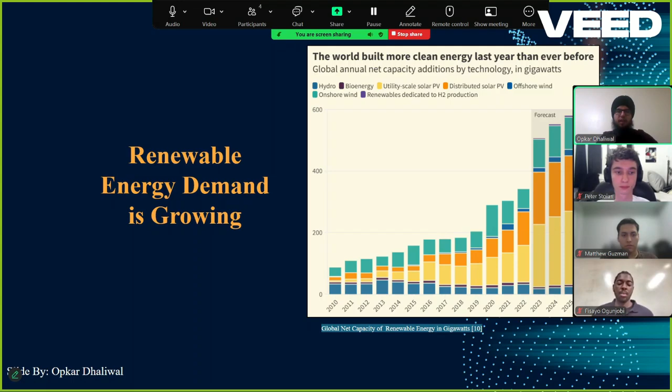As society advances their attention towards the environment and climate change, the importance of renewable energy is growing, as seen in the figure here. Renewable energy can greatly reduce the damage done to the environment. But the issue is that renewable energy sources, such as solar and wind, have a major drawback in that they are intermittent energy sources. This means they have an unpredictable output based on weather conditions and climate, which makes power plants operate at less than desirable efficiencies. This can result in supply of energy being low when needed, such as in winter.

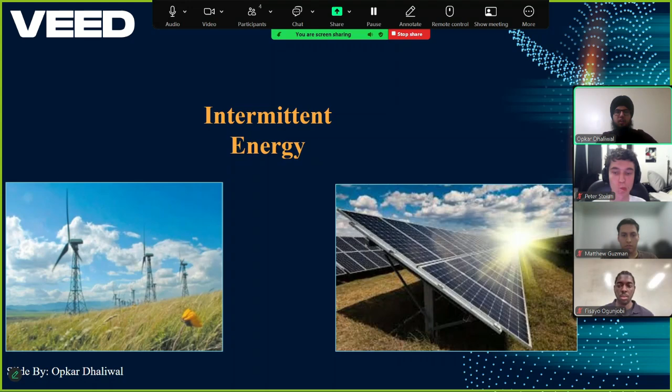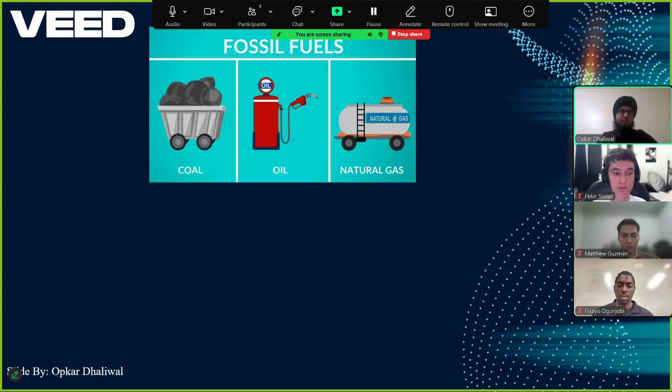The question becomes, how do we solve this issue? At first, someone might suggest looking for alternative energy sources, but this can only solve the issue in the short term. Going back to fossil fuels just aggravates the issue of climate change and results in the same problem. Others might suggest nuclear energy, which is clean energy. However, nuclear energy is not renewable and limited by materials suitable for fission like uranium and radioactive material. Other sources such as hydropower and geothermal plants are too reliant on geographic conditions and may impact Earth's environment in other ways, such as disturbing ocean flow.

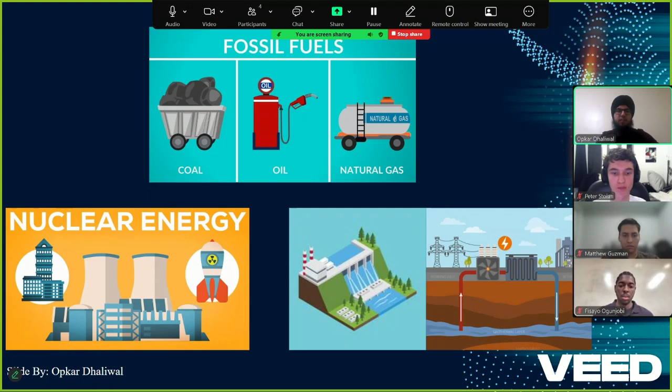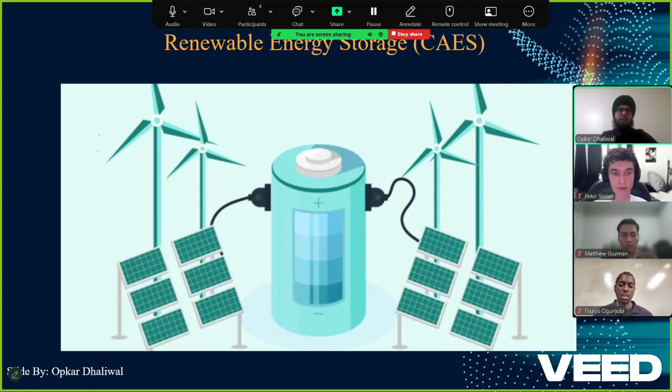The solution we have chosen to solve this issue is energy storing, more specifically compressed air energy storage. It's an emerging technology in the energy sector, a method of withholding energy until the energy is needed. This is a major focus in upcoming years to optimize renewable energy generation and would greatly progress society's efforts to net zero global emissions. The problem statement we came up with is: the intermittent nature of renewable energy sources creates grid instability and inefficiencies, while existing storage solutions have limitations in scalability and cost. Compressed air energy storage presents a promising alternative.

The purpose of this report is to give information about the current problems regarding renewable energy generation, and give some information about the emerging technology of CAES that we believe has great potential for innovation that future engineers can capitalize on.

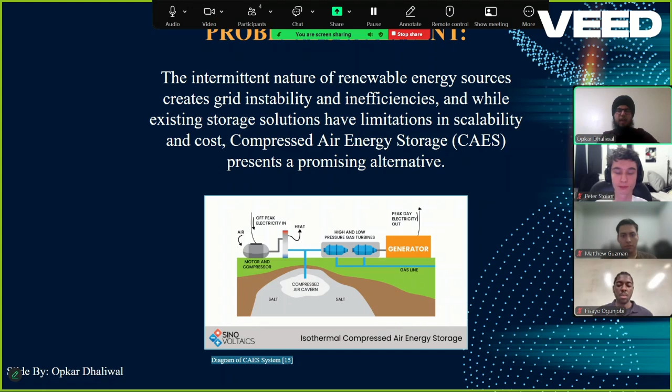Compressed air energy storage is an emerging energy storage technology that stores electricity by compressing air to very high pressures and storing it underground. It can be stored underground through many mediums, such as storage tanks or in already depleted natural gas reservoirs. After the compressed air is stored, it can be converted back into electricity by releasing the air that's stored underground. In doing this, the air is released and heated, which leads to its expansion, which is used to generate electricity through turbines. This works similarly to hydro storage,

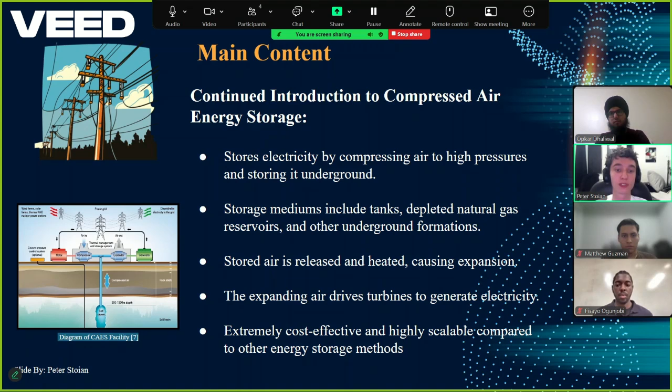which leads to the question of why compressed air energy storage is such a promising technology. Compressed air energy storage poses many benefits over other forms of energy storage, as it is extremely cost-effective, extremely easy to scale up, and is very flexible, having many different varieties.

There are three main types of compressed air energy storage systems, with diabatic compressed air energy storage being the most prevalent today. Diabatic compressed air energy storage uses electricity to store compressed air underground, which can then be converted back into electricity. The key factor is looking at the process of converting the compressed air back into electricity, as diabatic systems require external sources of energy to heat up the air before its release, which increases the total output of energy.

Another important version of compressed air energy storage is adiabatic storage. Whereas diabatic systems use external sources of energy to reheat the air before its release, adiabatic systems instead save energy generated from the compression phase and use it in the heating process. This eliminates the need for non-renewable energy sources or external sources of energy, which increases efficiency.

The third and final type of compressed air energy storage system is isothermal storage. The key difference that differentiates isothermal is the fact that during the compression and expansion phases, it will keep the temperature at a constant level, which will reduce the amount of energy lost.

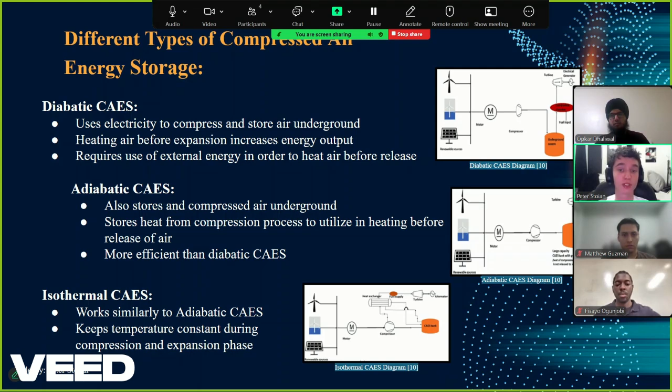The biggest limitation with this specific technology is that it is very difficult to implement on a large scale due to the difficulties in managing heat transfer throughout the system. Now, let's look at the main advantages of compressed air energy storage.

First, it is eco-friendly. It doesn't rely on rare earth metals or toxic chemicals, unlike battery systems. Secondly, it is cost-effective at a large scale. It is cheaper to produce at a cost per unit area. Another big plus is high scalability. You can often use existing geological formations like salt caverns, which keep the cost for infrastructure lower.

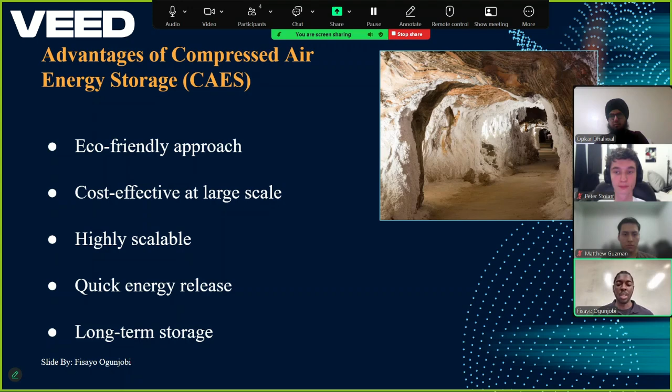It can also release energy quickly, which helps stabilize the grid when demand suddenly spikes. Finally, it allows for long-term storage, which makes it especially valuable for renewable energy like wind and solar, which we may need for a long period of time.

However, CAES does have some important limitations. Its overall efficiency tends to be lower than lithium-ion batteries, which can exceed 90%. Then there are geological constraints. If suitable caverns or reservoirs aren't available, creating them could be very expensive.

Another issue is heat management. The compression and expansion process can lose energy if heat is not properly captured. So while CAES works great in the right setting, it's not always ideal for the location and scale to be properly managed. Despite these challenges, ongoing research is aiming to improve the efficiency and reduce reliance on specific geological features.

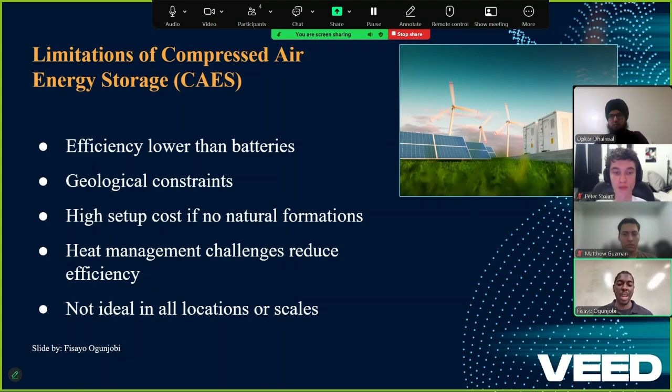The CAES method offers lower costs compared to other methods when geological conditions are favorable, such as caves or abandoned mines, and is able to convert energy back with an efficiency of around 70% under the most ideal conditions and technology. While it has some limitations in terms of efficiency and local geography, they can be surpassed, leaving this emerging technology to have a bright future ahead.

In terms of innovation, there are several possibilities. The inclusion of thermal management systems, by creating a mixed energy storage system combining CAES with thermal energy storage, allows for a more effective heat loss reduction. Combining thermal energy management systems allows for an increase in both efficiency and energy density.

Using large artificial tanks or above ground tanks can remove the need for caves while also making it more costly. In addition, future developments of CAES systems are being done in different places in the world, where smaller or even mobile CAES systems are being deployed, demonstrating the potential flexibility of the solution.

The first station using an underground compressed air energy storage system is a reservoir operated in 1978 in Germany, outputting 290 megawatts for 2 hours. The second one was built in 1991 in Alabama with 110 megawatts of output. Canada has 2 operating compressed air energy storage systems in Ontario with a total capacity of 2.4 megawatts.

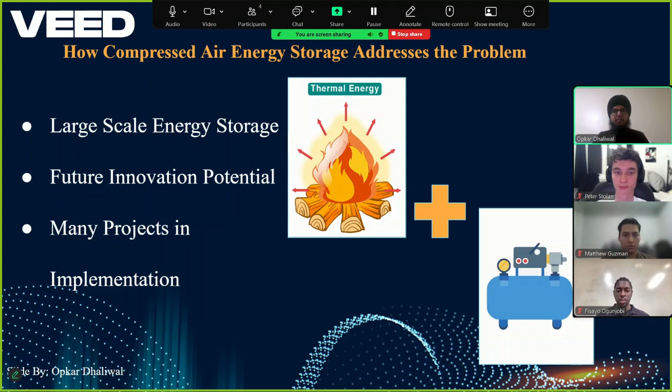And even in the last decade, several more projects have been initiated in the US with a range of 175 to 350 megawatts. As such, we believe the future prospects of CAES energy systems are very bright.

In conclusion, compressed air energy storage is a promising energy storage technology. While it has certain limitations, the continuous advancements in its technology allow for improvements in efficiency through its integration into the power grid. One of the key aspects of compressed air energy storage is its ability to store large quantities of energy at a much lower cost than other competing emerging technologies.

Unlike other competing systems, compressed air energy storage thrives in its ability to be implemented in many different geological areas as it has few constraints. Despite all of the benefits and strengths of compressed air energy storage, it also faces certain limitations, such as its overall lower efficiency. A hybrid approach would be the key to improving performance to make this system viable for future implementation.

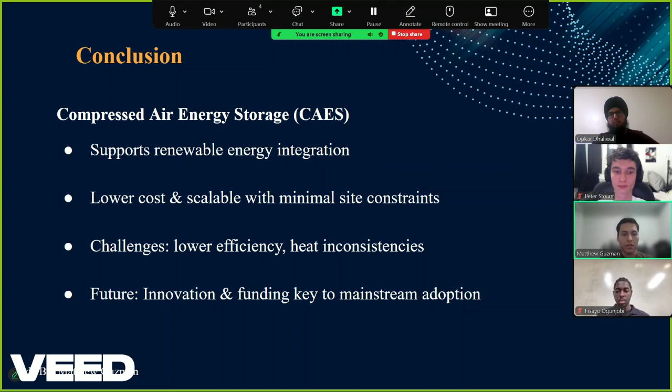Looking to the future, a continued interest in compressed air energy storage, as well as a steady flow of funding and bright minds, will all be pivotal in making this technology a mainstream energy solution. With improvements in efficiency and cost effectiveness, compressed air energy storage can be a key aspect in the transition to renewable energy sources. On the following slides are listed the references, and thank you for listening to our presentation.